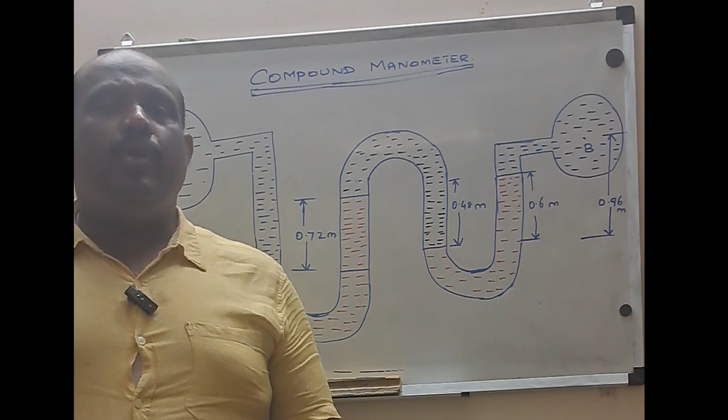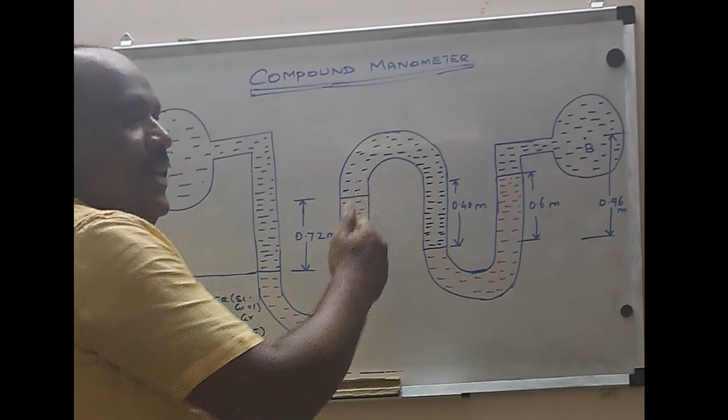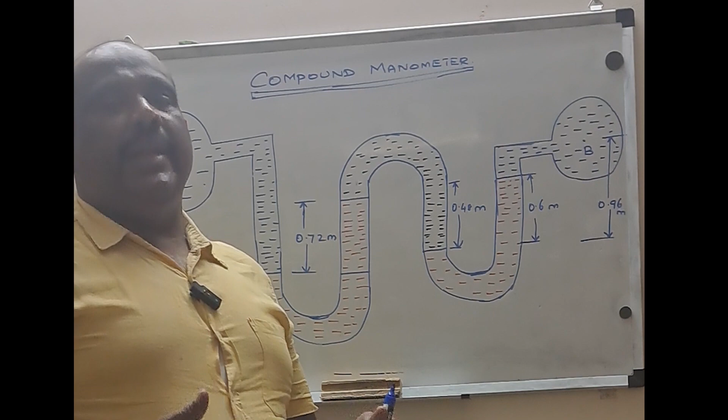The manometer is called a compound manometer because if I look at this section, it is a normal manometer. If I look at this section, it is an inverted U-tube manometer. If I look at this section, it is a normal U-tube manometer. So it is somewhat compound, not simple.

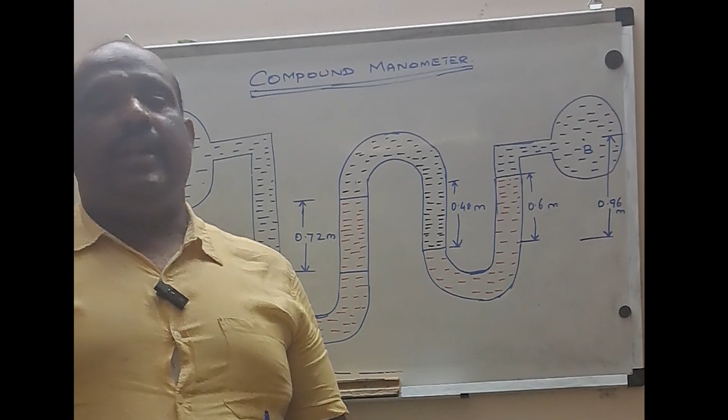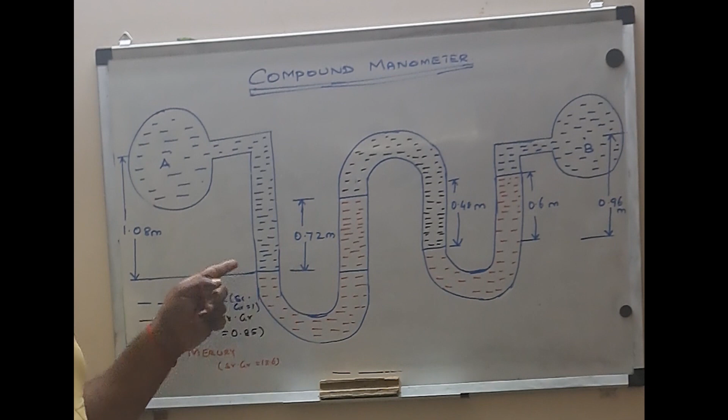It is an addition of normal manometer and inverted U-tube manometer, hence the name compound manometer. This device is used to find the differential pressure between fluids A and B. A and B may be of any liquid. In this example, we have taken both A and B as water, given in blue color marked as water.

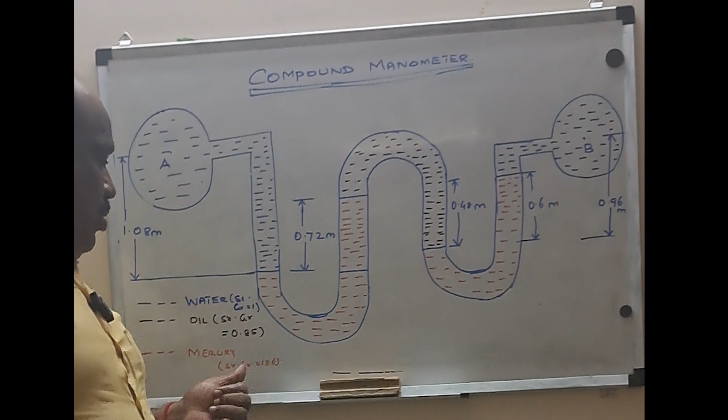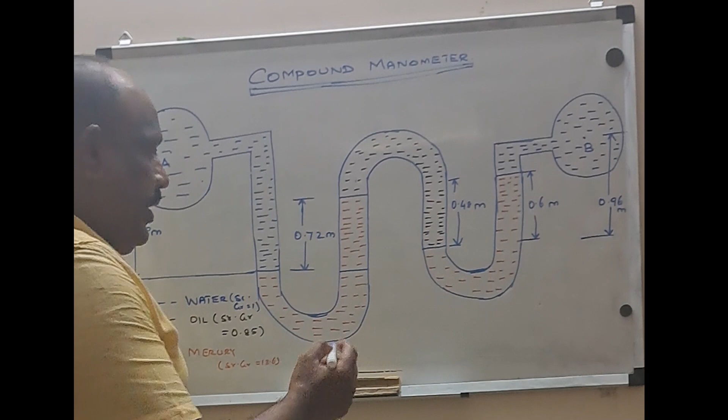This red color line — I know that whenever we want a normal U-tube manometer, it should be of higher density. Here the higher density fluid is mercury, whose specific gravity is 13.6, corresponding to a density of 13,600 kilogram per meter cube. So the density of this mercury here and here, both are mercury. This is also mercury, this is also mercury.

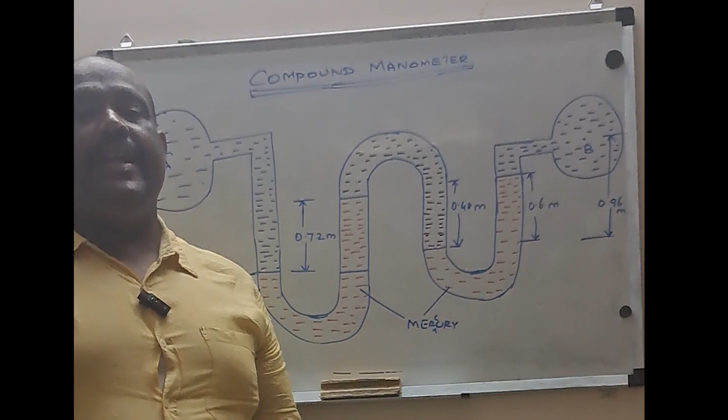So whenever it's a normal manometer, we will have higher density fluid, namely mercury, whose density is 13,600 kilogram per meter cube.

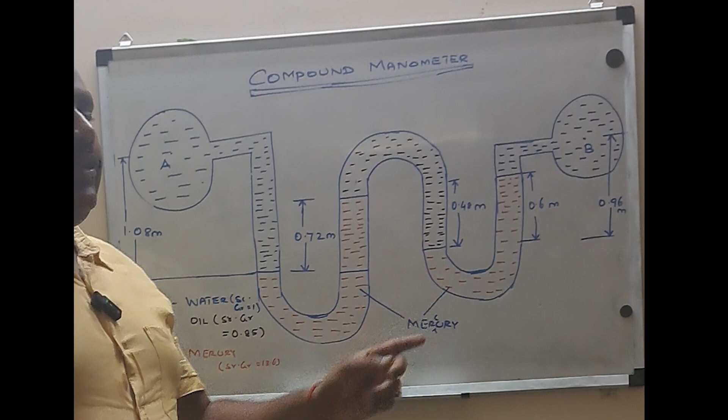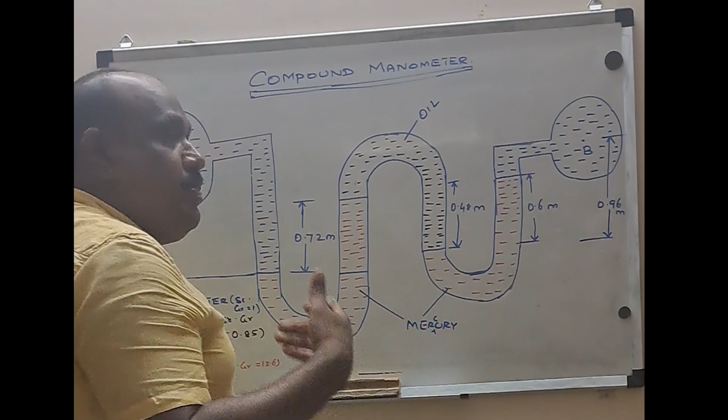Whereas when I am going for an inverted U-tube manometer, in this diagram, this portion is nothing but the inverted U-tube manometer. So I should have an oil or any fluid whose density should be lighter than water, or lighter than the two fluids whose pressure is to be determined. Here the specific gravity of this oil is 0.85, which means its density will be 850 kilogram per meter cube.

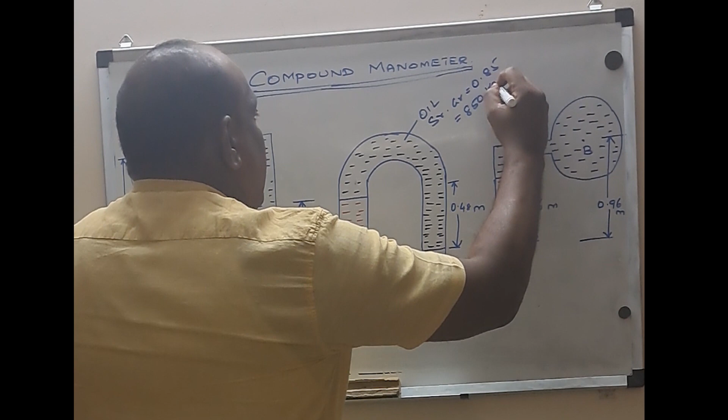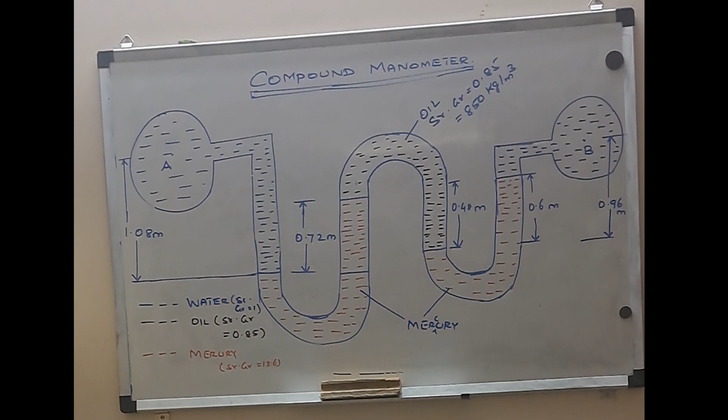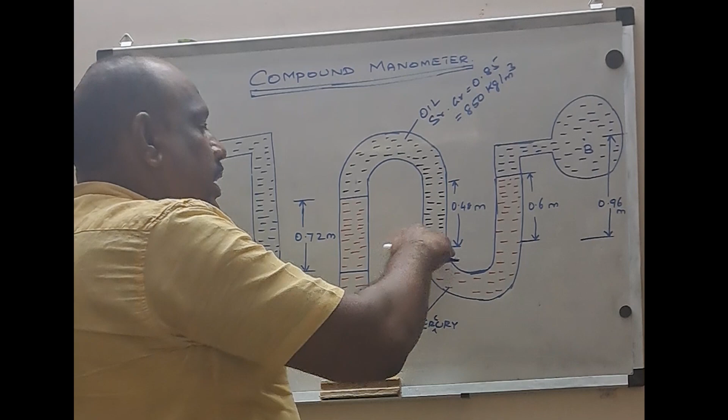Now they have given the height of this water column from A up to the mercury level as 1.08 meter. Similarly, in the right hand side limb, the mercury has risen to a height of 0.72 meter from the datum. Similarly, here the oil has come down to a height of 0.48 meter from the datum position.

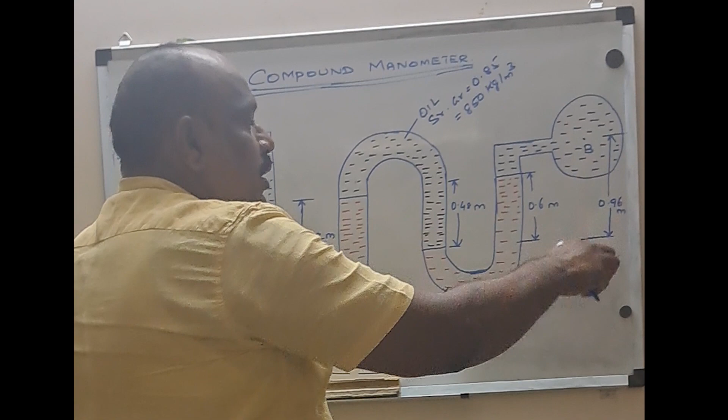Similar to the other side, the mercury has risen to a height of 0.6 meter, and the distance from the center of B to this particular height is 0.96 meter. So these are the data already given in the problem.

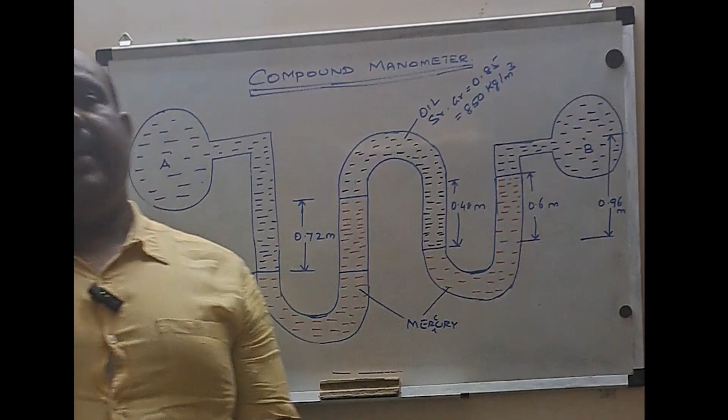So my question will be now, what may the question ask? They can ask either find PA minus PB or PB minus PA, because this compound manometer is also used to determine the differential pressure between A and B.

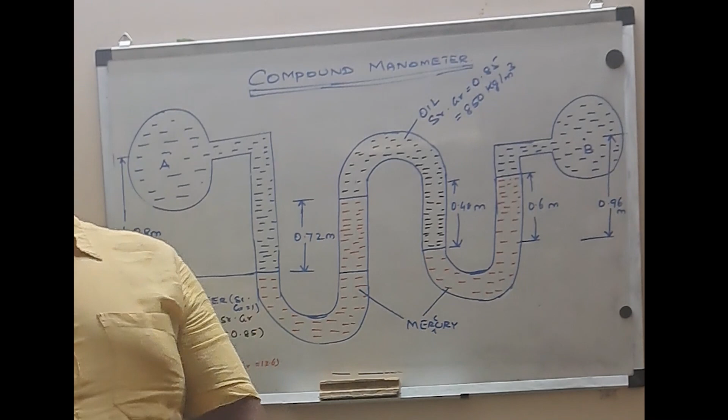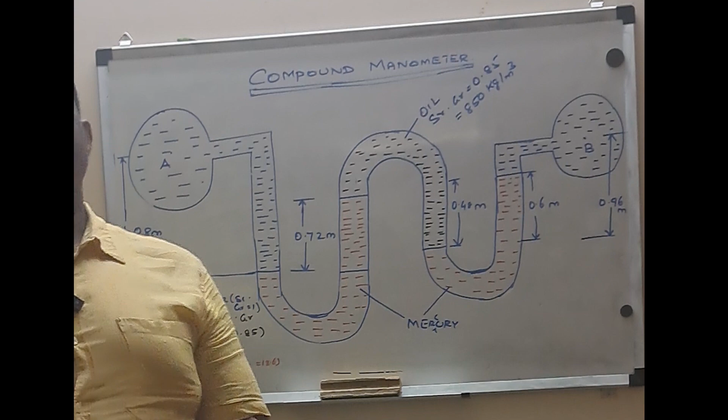If PA minus PB is positive, it means PA is greater than PB. If PB minus PA is positive, it means PB is having higher pressure than PA. So the only question from this diagram they can ask is to find the differential pressure between A and B, that is PA minus PB or PB minus PA. Don't worry about the sign.

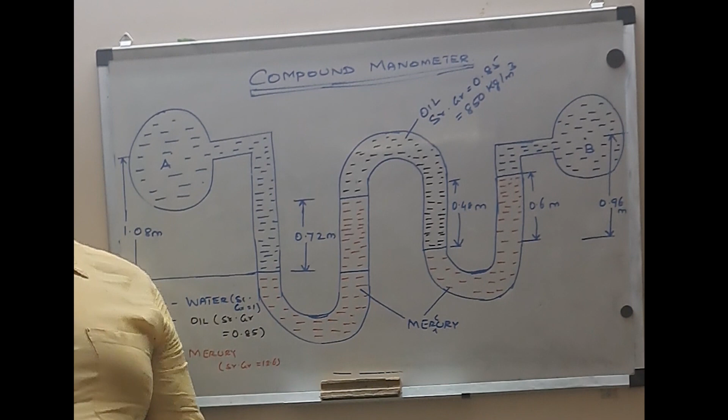Now, how to approach this problem very easily? How to solve within some 5 minutes? How to solve this problem? I will tell you.

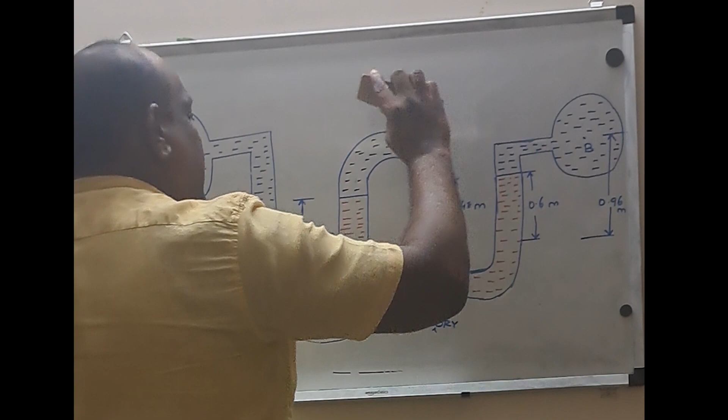I will make use of the top portion of the board so that we can make use of the diagram also. I will start with the left hand side. What is the left hand side? Here, when I am going to consider from here to here, this is my section.

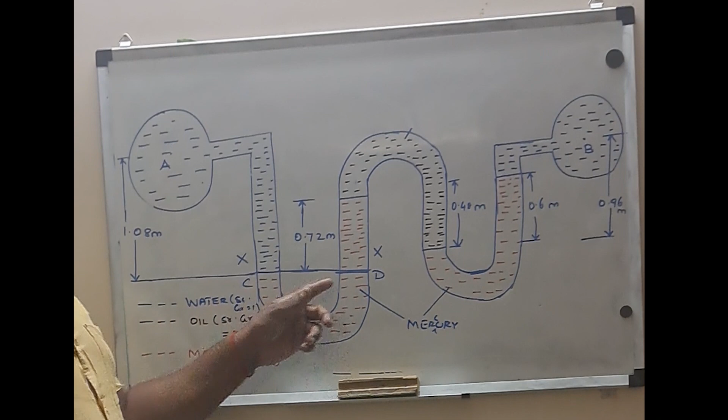This is my section here. So it has to be XX. So let the points be C and D. So what do we know? Pressure C equal to pressure D. Got the logic what I am telling? Pressure C should be equal to pressure D.

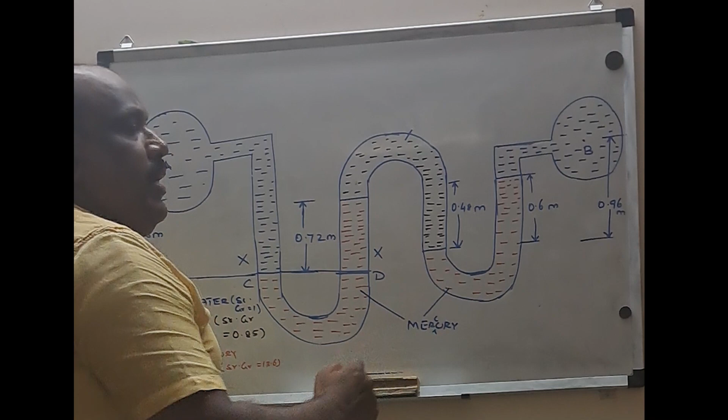Then once again, I can draw another line, another datum line, because it's an inverted U-tube manometer. The datum line should be at the topmost possible. So this is the line. Got it? This is the line.

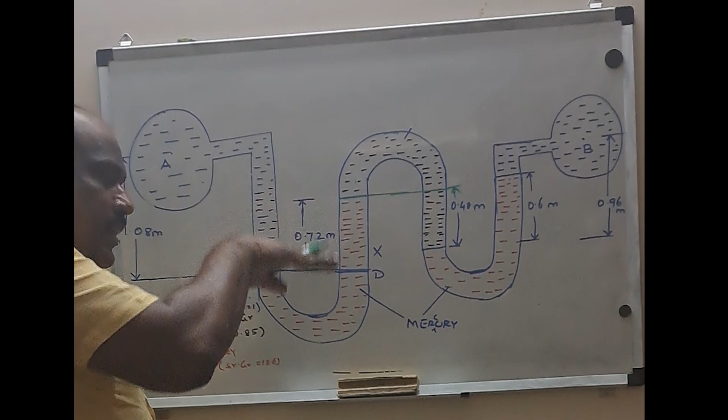So up to this side is 0.40. When I'm coming to a normal U-tube manometer, it should be at the maximum down possible. So I have drawn the plane at XX and named it CD.

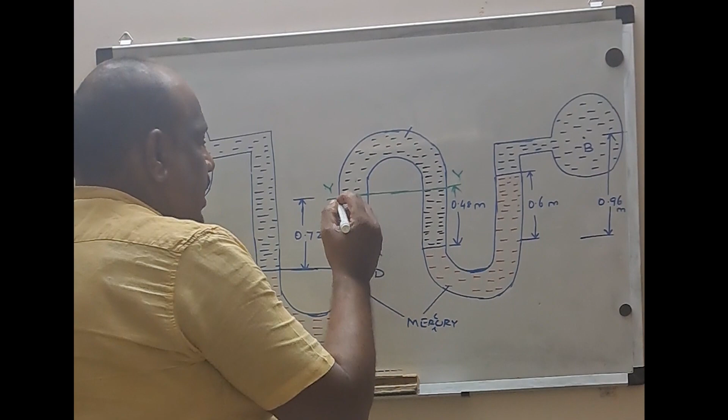Now let us call this line YY, and we will call the points E and F. Now it becomes a normal U-tube manometer, so our datum should be at the maximum down possible. So I will draw it like this.

So what is this called? Let us call it ZZ. And let us name these points C, D, E, F, G, H.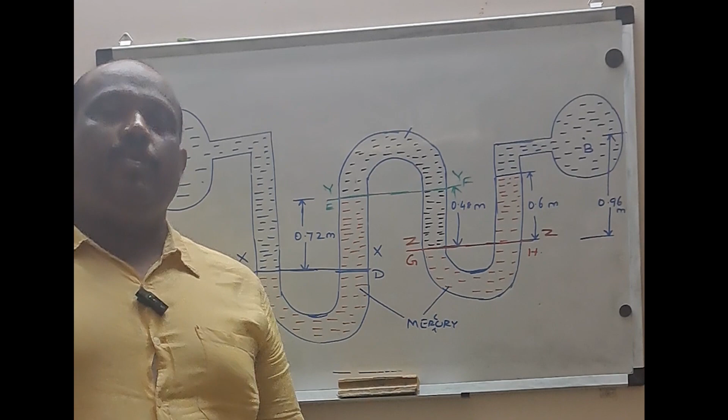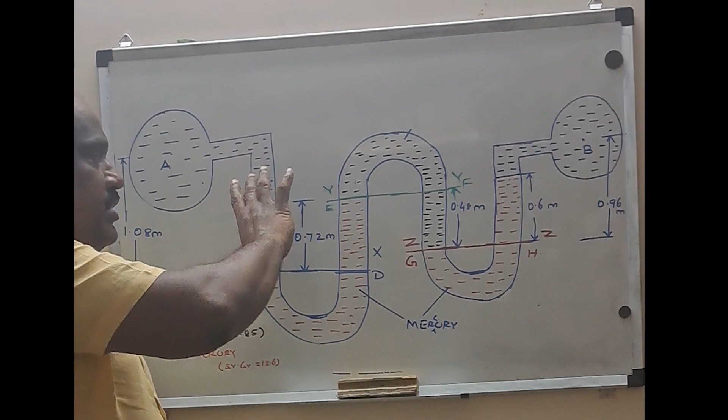I will repeat the steps we have done after the problem was given. We have made 3 datum lines: 2 normal U-tube manometers and 1 inverted U-tube manometer. In the normal U-tube manometer, we have to find the datum height at the maximum downwards possible, which is the separation of liquid A and the mercury. So from C, I am drawing a horizontal line. This is my first plane.

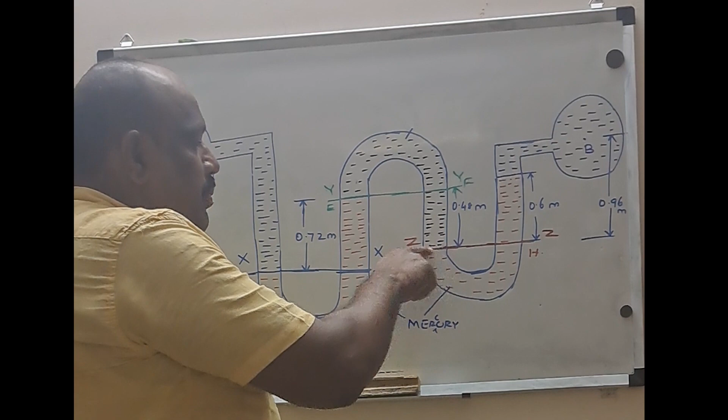Then coming to the inverted U-tube manometer, it should be at the topmost possible point. I should not stop here; I had to go up to this point because this is where mercury separates from the oil. So this is YY, and we'll call these points E and F.

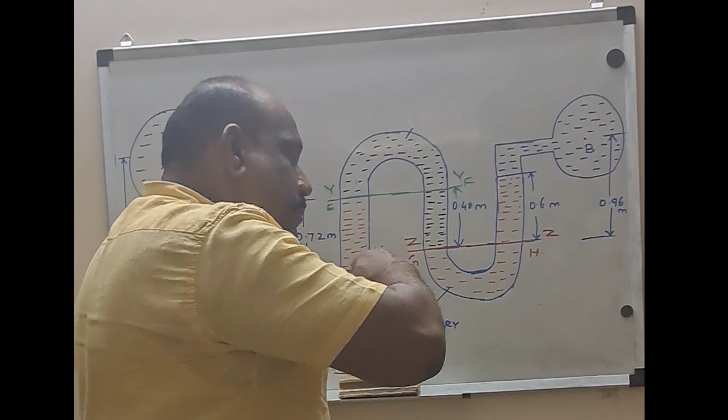And once again, it's a normal U-tube manometer, where I'm going to draw the maximum downwards possible, which is Z, where the oil and mercury get separated. Let these be G and H. Other things remain the same.

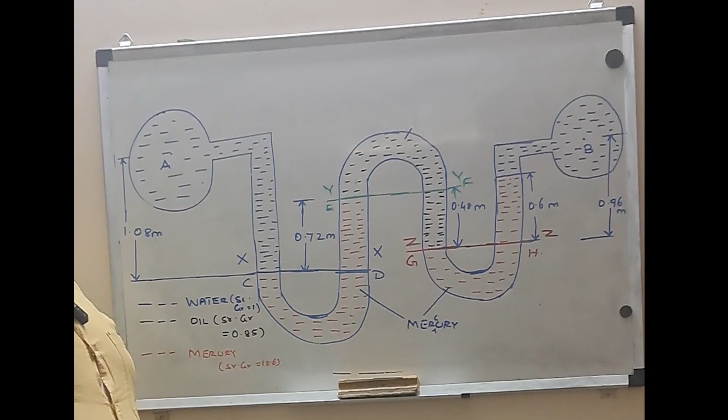Now I hope you are clear how to choose the 3 datum heights. What are the pressures at C and D? Yes, pressure at C and D are the same. What are the pressures at E and F? They will also be same because they are at the same datum height. What about G and H? They will also be same for the same reason.

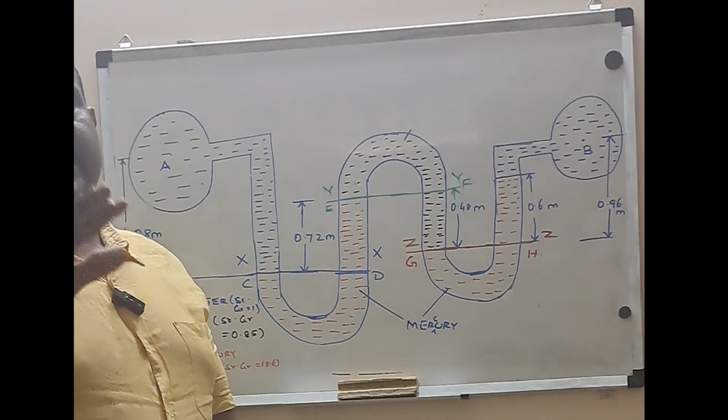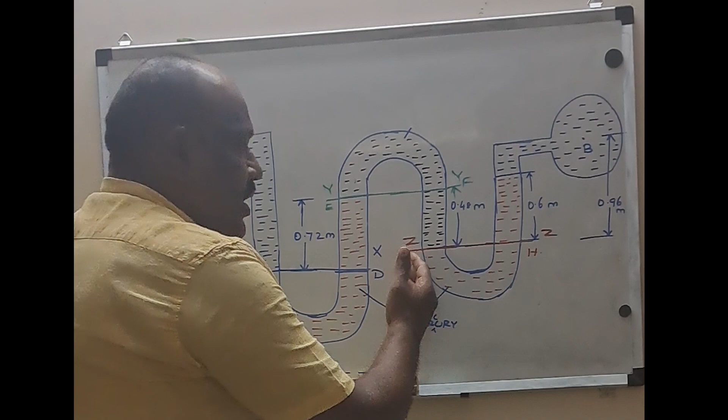By this approach only we are trying to move. The approach is very simple: the pressure at C and D will be equal, the pressure at E and F will be equal, and the pressure at G and H will be equal. Based on this principle, we are going to solve this problem.

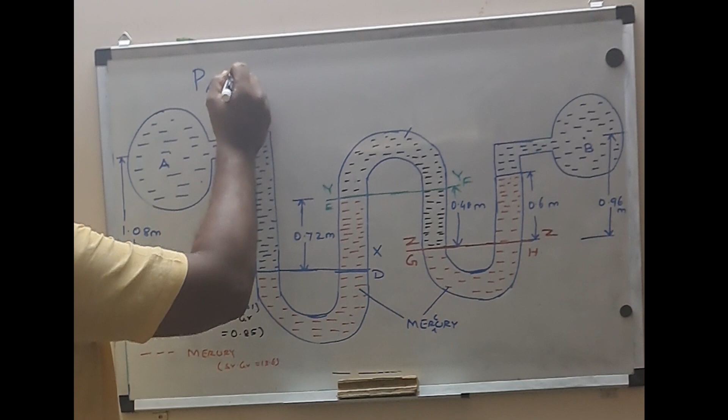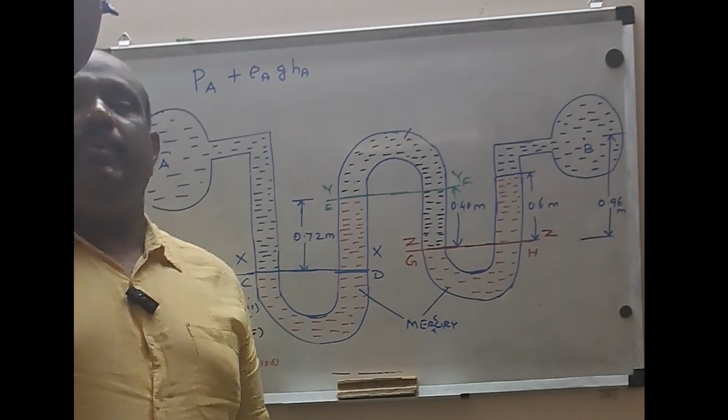How to solve it? Let us start from the left hand side: PA, plus rho A into G into HA. Whether it is positive G or negative G, it is positive here because the water is coming downwards, so G is positive. Whenever the liquid is coming down, it is positive; whenever it is going up, it is negative.

So this is positive, this is negative, this is positive, this is negative. I'll repeat: whenever the fluid is coming downwards from top to bottom, it is positive, because G acts towards gravity. When it's going up on the other side, it is negative. So once you take a cycle, you move from left to right without changing the order. So this one is positive, the next is negative — that's the approach we are going to follow.

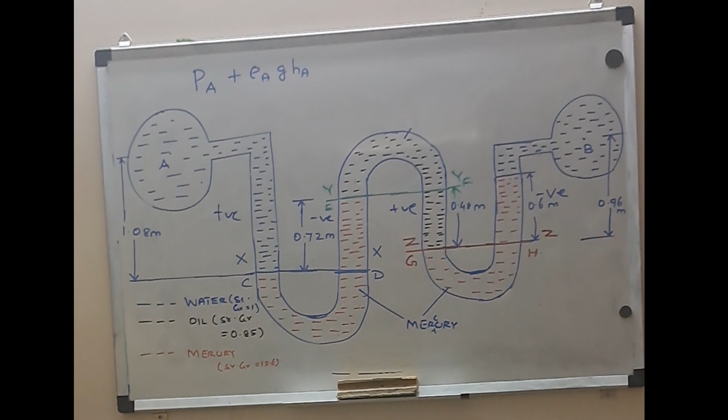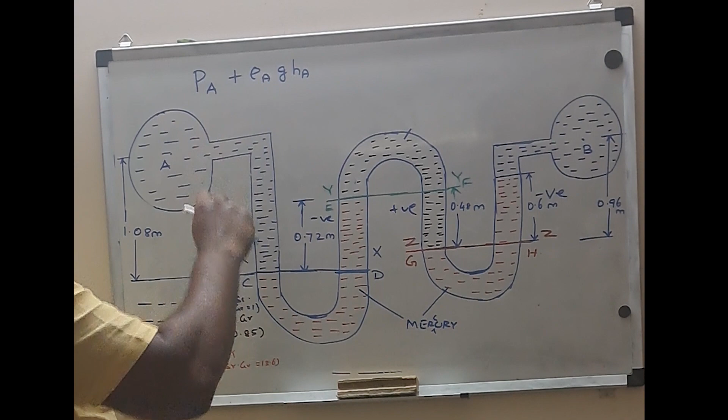So we have PA plus rho A G into HA plus rho A into G, where rho A is the density of A, G is positive, and HA is the height. HA is not 0.72; it is from A up to this point, which is 1.08. So HA is equal to 1.08 because we are moving up to C — the distance from the center of A to this datum height is 1.08 meters.

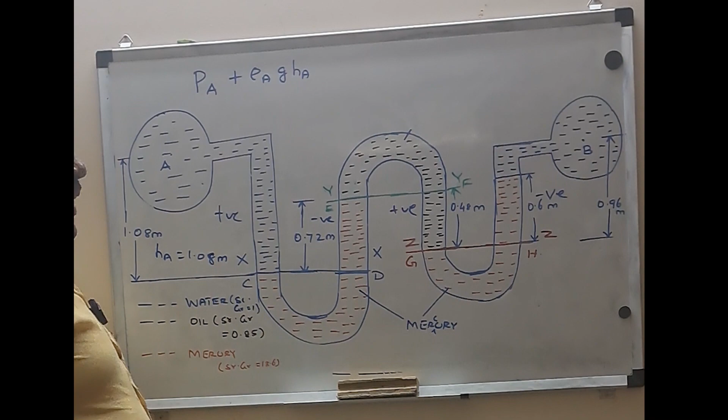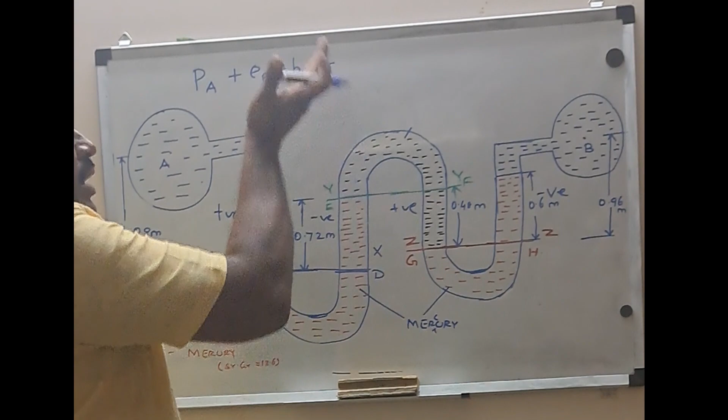Then we know that the pressure at C and D are the same, so don't worry about this section, leave it. From C, I am jumping to D. Here you put a minus sign because the fluid is moving upwards — when it's coming down it's positive, when it's going upward it's negative.

So minus — what is this one? Mercury, the red color is mercury. So it's rho of mercury into G; because of G it becomes negative. Into the height from D to Y, which is 0.72, as already given in the problem.

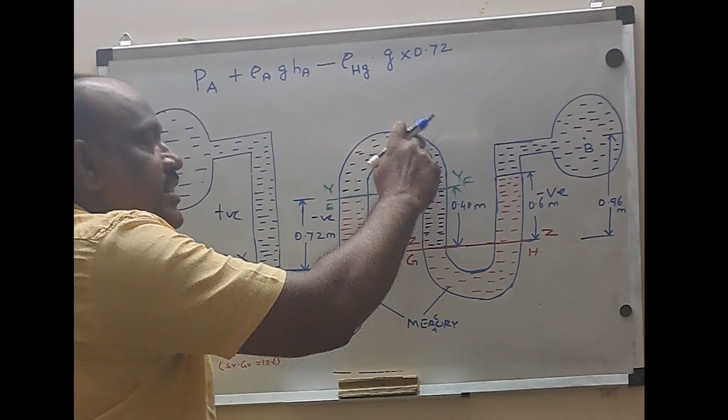Now, since the pressure at E and F are the same, it's enough to jump from E to F — there's no need to find the pressure in that column. So you jump from E to F in the U-tube. Now from F to this point, it is positive, because as already written, when the fluid is coming downwards it is positive.

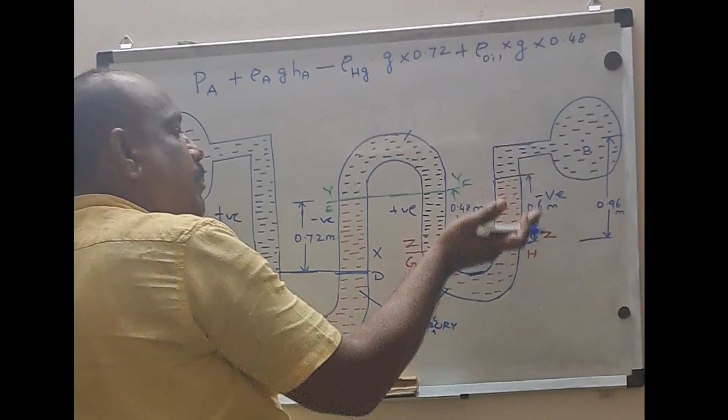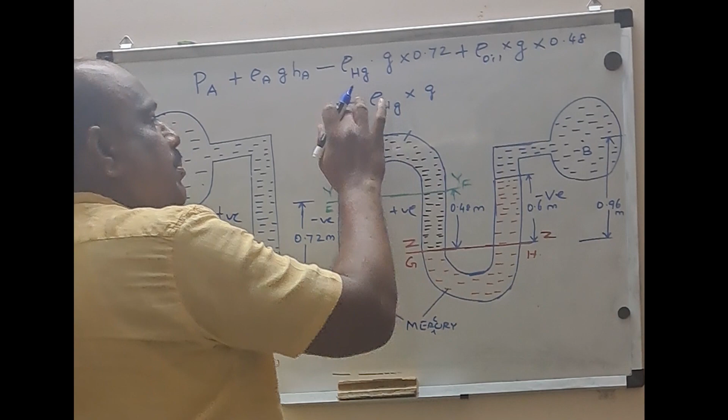Now it's not the density of mercury, it is the density of the oil, plus density of oil into gravity — positive — into the height, which is 0.48 with respect to this datum. And once again the mercury is going up, so it's negative: minus rho into Hg into G, because the gravity is against the flow, so it becomes negative, into its height, which is 0.6.

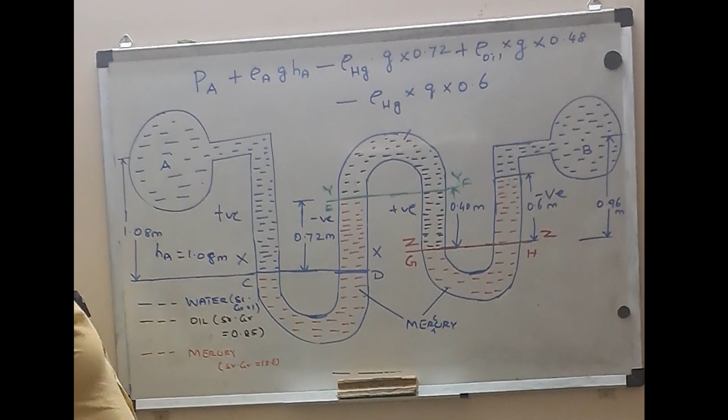Then what about this height? I want this particular height. Let it be say h.

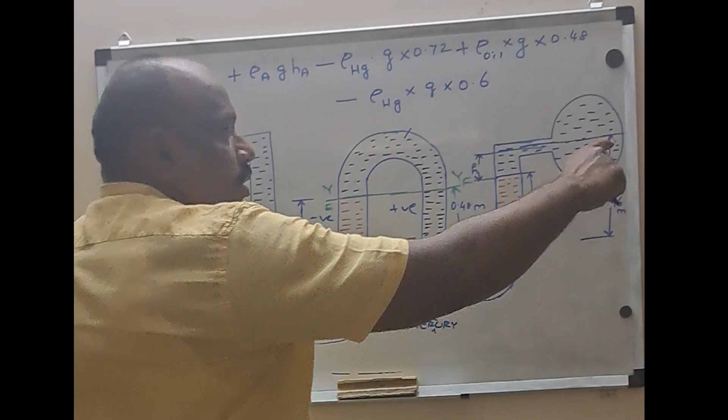This height will be equal to what? 0.96 minus 0.6 will give me the height between the center. I hope it is clear. If I'm going to have this height minus this height, this will give my this side, because that is height.

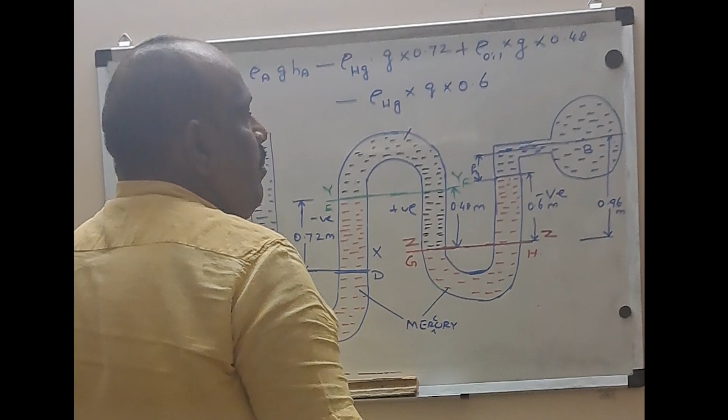I want the pressure which is exerted by the liquid B because of the vertical height H. That height will be what, whether positive or negative? With respect to this one, it will be negative.

So my value is going like this: negative minus rho of water, rho of water means rho of B here, into G. Why it's negative? Because this water is moving, it is still above this one. So it's negative into what is here, 0.96 minus 0.6.

This 0.96 minus 0.6 will give me 0.36, that only we have written here, which will be equal to PB. I will repeat the steps once again. I am starting from left hand side and I am going to reach the right hand side.

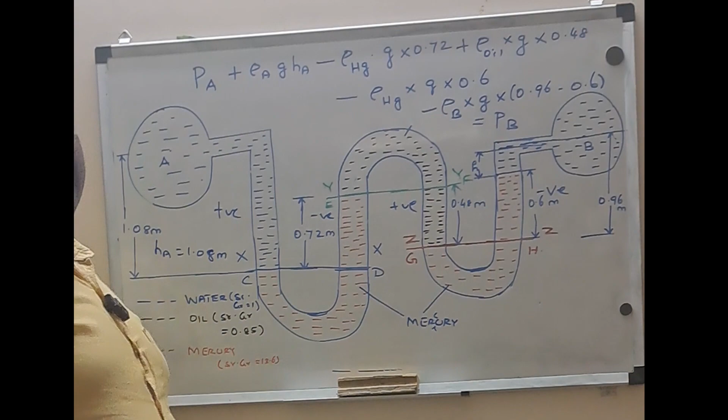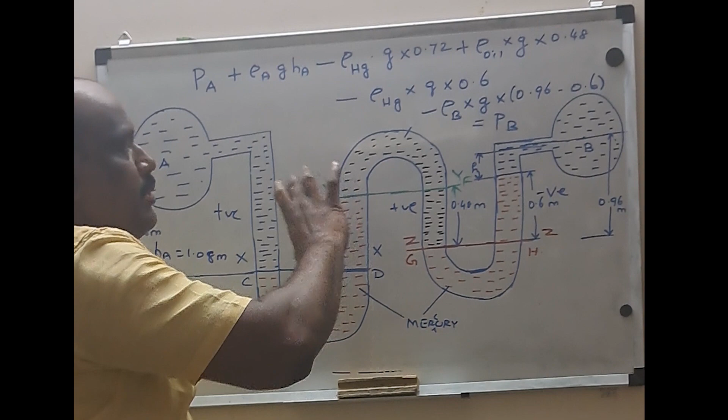So it is PA plus rho GH. That rho GH is positive because it's coming down. I am moving from C to D because both are the same pressure, but the mercury is moving up, so it's negative minus rho GH, rho of mercury into G into this side is 0.72. E and F are the same height, so I am jumping from E to F.

Once again, this oil is coming down, so it's positive. So plus rho of oil into G into this height is 0.48. Now the mercury is going up, so it's negative. So minus rho of mercury into G into 0.6.

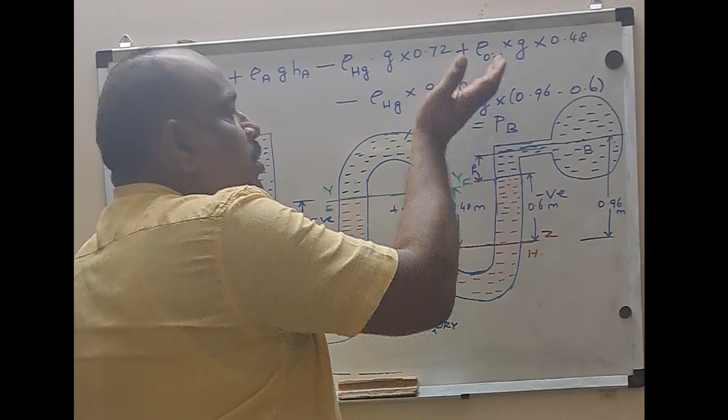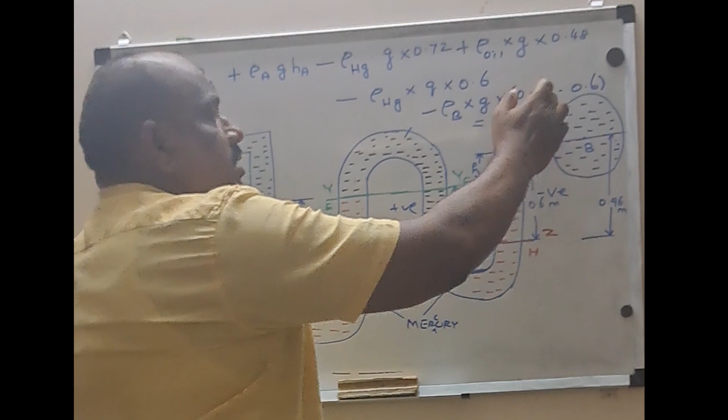Then once again you should not forget about the small height, because this height will be also the pressure exerted by the liquid B. So that is also negative, because it's moving up with respect to this datum. So it is minus rho B into G, rho B means the density of the water of B, into G into this height, which is 0.96 minus 0.6, that is 0.36, which will be equal to PB.

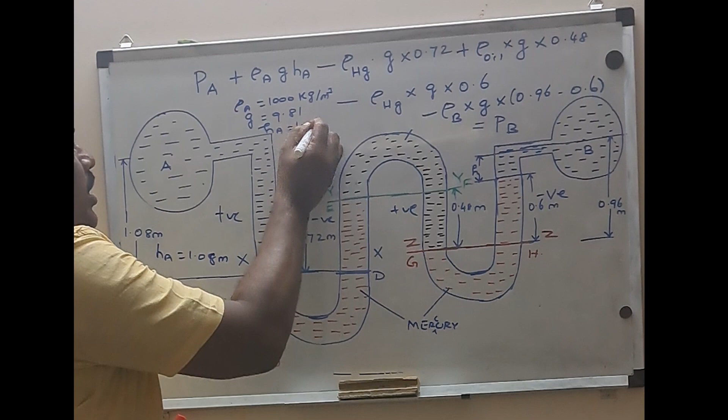So from this equation, what are the unknowns? You know rho A. What is rho A? Rho A equal to 1000 kilogram per meter cube. What about G? 9.81. What about HA? HA equal to 1.08, already we have written here and explained also.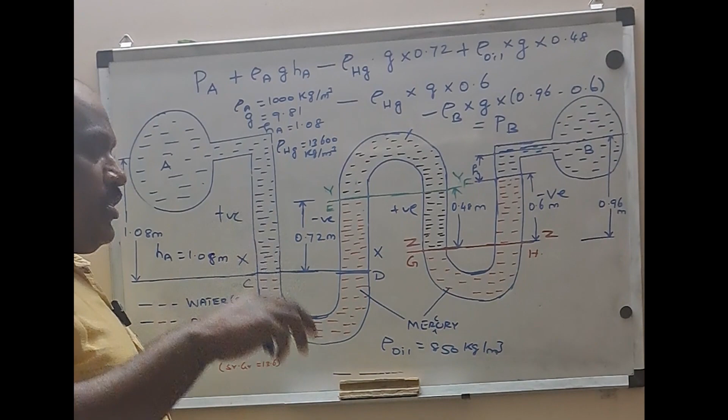Then rho of mercury also we know, rho of mercury equal to 13,600 kilogram per meter cube. G is also known, this height is also known. Rho of the oil, already we know it's what? Rho of oil will be equal to 850. Why? Because the specific gravity is 0.85, its density should be lighter than water. Yes, it's lighter than water, it's less than 1000, so 850 is right.

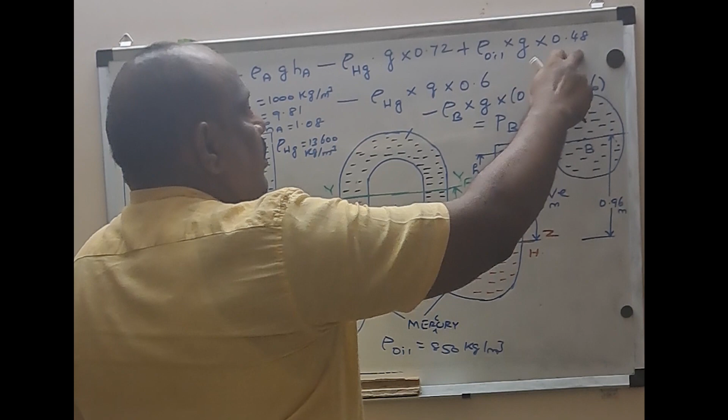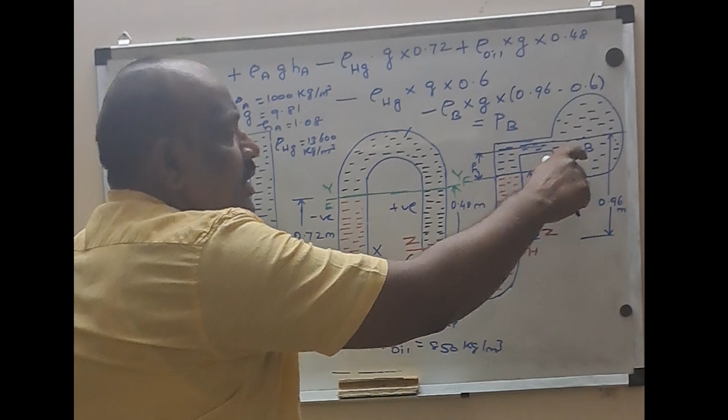So rho 1000 into... 850 into 9.81 into 0.48. Then I am coming here, density of mercury 13,600 into 9.81 into 0.6. Minus density of water, this B is also water here, so it's minus 1000. Rho B is also, I can write rho A equal to, rho B is also equal to water, so 1000 into 9.81 into 0.36.

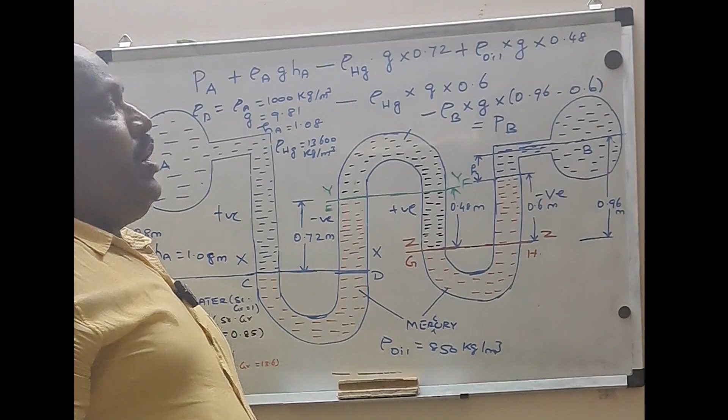So this entire equation has all the values except PA. Some values will be equal to PB. PA minus some value will be equal to, let us say that value is X. PA minus X equal to PB. So PA minus PB, we can find out what? PA minus PB equal to X.

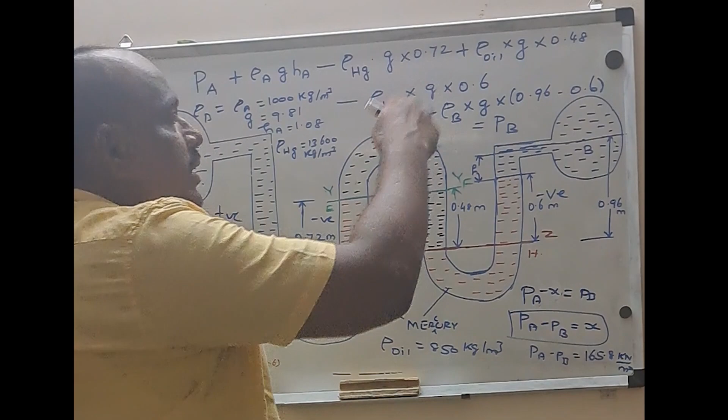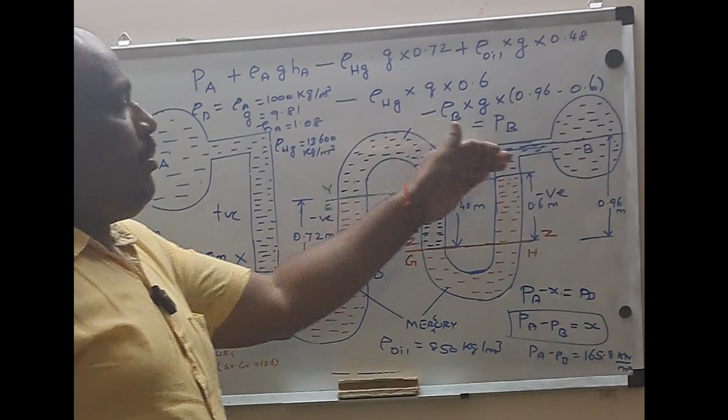Now this value of X, I hope if you are going to solve, it will be 165.8 kilonewton per meter squared. I am not doing the full calculation, but I hope you can do it on your own and find the value of PA minus PB. What does it indicate? The pressure of A is more than the pressure of B by 165.8 kilonewton per meter squared. That is the final thing we are arriving at. Here I may make small mistakes in the numbers, but don't worry about the numbers because I am not taking the accurate decimals. If you take the accurate decimals, you will end up with the answer.

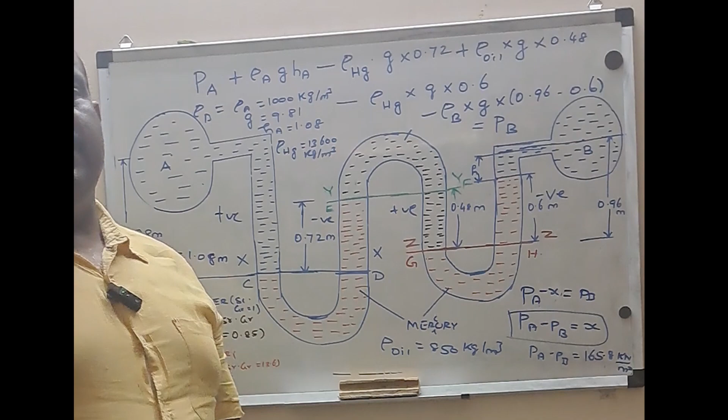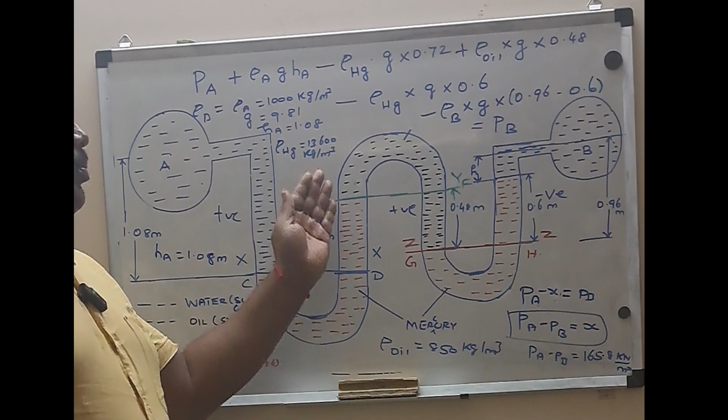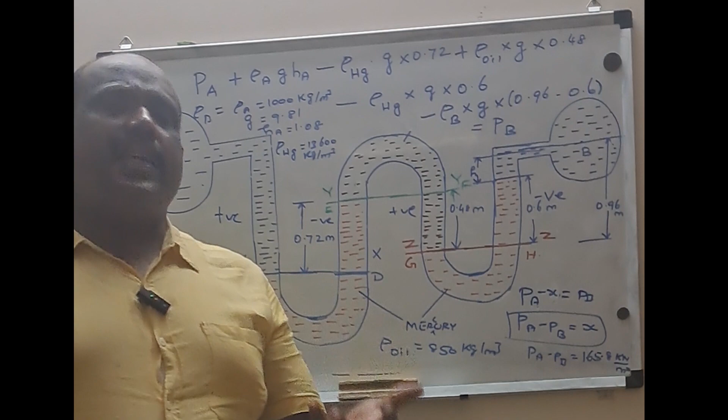So I hope it is very clear. Please enjoy the subject of the compound manometer, which takes care of both the normal U-tube manometer as well as the inverted U-tube manometer. Once again, the logic is to find the differential pressure between two liquids. These two liquids may be of the same liquid in nature or may be of different liquid in nature. That's the only approach. I hope you enjoyed it.